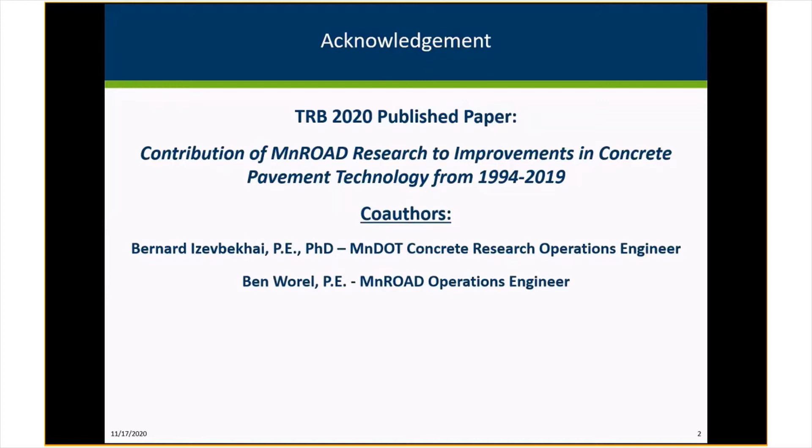Before I begin, I'd like to acknowledge my co-authors. Much of this presentation stems from work that we put together, a TRB paper last year. It was published, very similar title. I had altered it a little bit because I have some updates. But again, I want to thank Bernard Izevbekhai and Ben Worel for helping complete this paper that really looked at what's been accomplished related to concrete pavement technology over the past 25 years.

Just an outline of today's presentation. I'll give a brief history of MnRoad for those that aren't really familiar with the project and how it evolved. And then I'm going to spend most of my time outlining the significant contributions to concrete pavement technology that we feel have come out of this facility, related to design, materials, construction, rehabilitation, pavement monitoring, evaluation, and full-scale testing. And then I'll wrap up the presentation talking a little bit about the future.

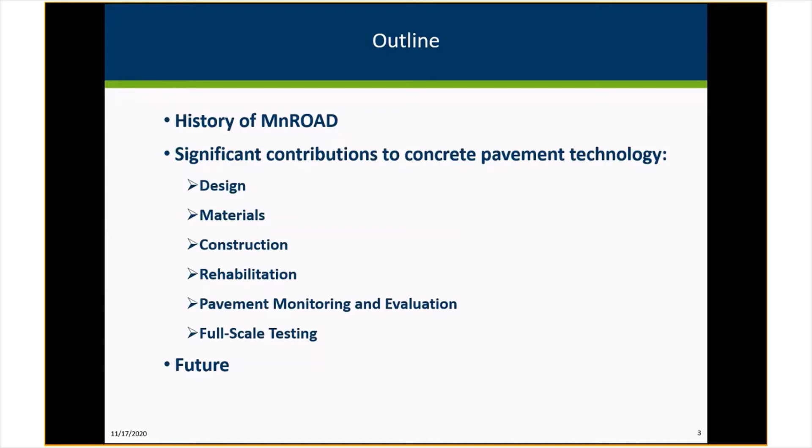So the MnRoad facility, for those who are kind of new to it, it's a full-scale test track in the mid-section of Minnesota. Has a couple components: a 3.5 mile mainline section here that receives interstate traffic that's diverted off of a parallel section of I-94. And then there's a 2.5 mile low volume closed loop test loop, which receives trafficking from one legally loaded semi-truck tractor trailer.

MnRoad is kind of unique in the nation, the fact that it has all the different materials. There are other test tracks in the US and around the world that are focused on one specific material. This particular facility covers all the material types, predominantly asphalt and concrete. And then if you want to talk about composite pavements or overlays, that has also been incorporated into the facility over the years.

Operations began in 1994, and one of the unique things, of course, it's run by a public agency, so the data is freely available. And really, what it provides is opportunities for bold ideas. This is a place where you can afford to fail because we have the opportunity to switch traffic off, back to the old main line of I-94, or if something happens on the low volume route, we can shut down operations of the truck. So again, we're celebrating over 25 years of operation.

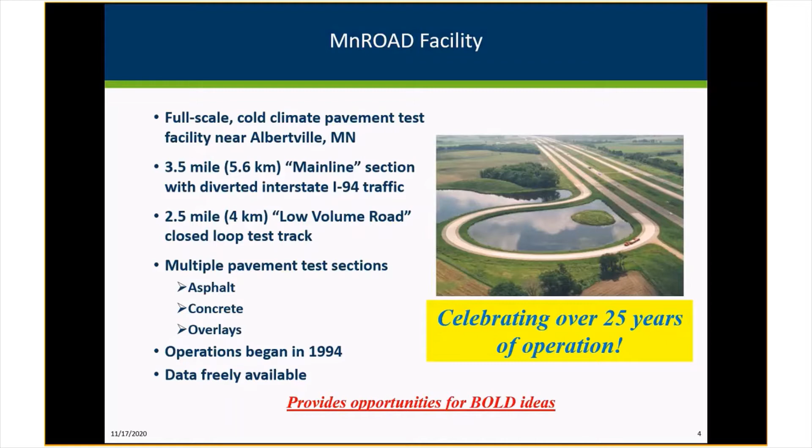It's been a fun ride. Talking a little bit about the operational history, the facility itself, planning started in the late 80s, and it took up until 1994 to get it constructed. It was constructed for about $25 million, in those 1994 dollars. If you were to construct this facility today, it'd probably be 3 or 4 times that amount. So it really was an incredible investment by MnDOT to build this facility.

Phase 1 was funded by MnDOT and the Local Road Research Board, which receives a fixed amount of state tax to look at local road research issues. Again, that kind of predominantly focuses on that low volume road loop. And we also received FHWA funding. And when it started, all the experiments were determined by MnDOT and the Minnesota Local Road Research Board because all the funding was coming from that.

Then in phase 2, about 2007, we started adding some pooled fund partners in addition to the MnDOT and the Local Road Research Board and FHWA funding. So we started becoming a little bit more of a national facility. And some of the experiments were not totally determined by MnDOT anymore. There was starting to get some interest by national partners, and something maybe another state wanted to study, and we would put it on here and study it for them.

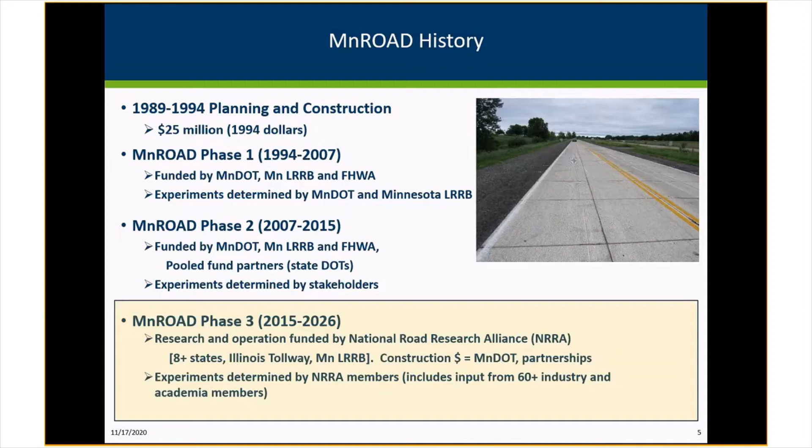Construction remained with MnDOT, but then again, we started receiving some construction money and help from partnerships. The big shift now is that all experiments are determined by NRRA members. This includes not only state agencies, but other industry and academia members. I'll talk about more of that near the end of the presentation.

So looking specifically at the concrete pavement related history, the sections that were concrete pavement test sections on MnRoad, you can see we've had quite a number of sections. Phase 1 really focused on validation of what we were using back then in the early 90s, the AASHTO 1993 design, and specifically there was test sections on the mainline section that were designed to last 5 years and 10 years according to those design procedures. And then there's also some other related studies, materials, low volume road designs.

And then near the end of phase 1, we started looking more and more at white toppings and bonded concrete overlays of asphalt because those were starting to become popular and they wanted to learn more. So we started constructing those.

Phase 2 opened up again. We started getting pooled funds, so we get a little more breadth of the type of topics we're looking at. Again, more white topping sections. Some of the things we were starting to see from the first phase was that the AASHTO designs were very conservative, so the question was, well, how thin can we go?

So we constructed some very thin sections, and that's really one of the things about this facility is you can take those chances that if it fails, you still have the opportunity to switch traffic off and kind of address the issue.

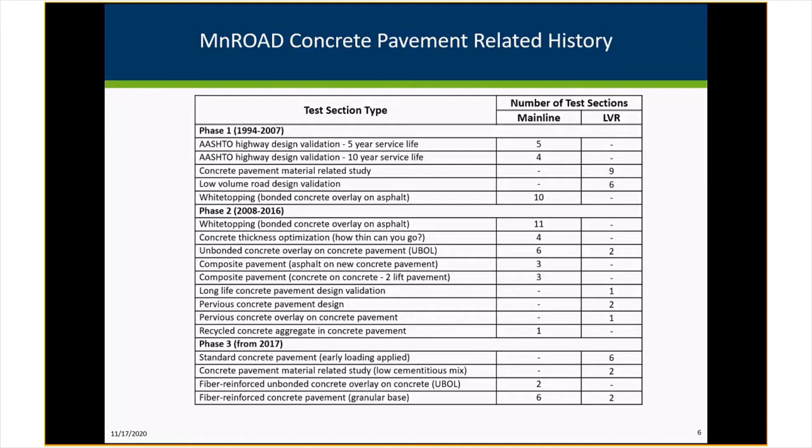So I'm going to give you a little bit of summary of what we feel is some of the significant contributions, related to improving the knowledge, implementation of findings. I'm talking about some of the test equipment that's been either evaluated or developed at MnRoad. Talk a little bit about what did not work, which actually in the realm of pavement research is a benefit to the people because you can avoid, rather than doing miles and miles of something that's going to fail, you can do a short section and we can tell ahead of time that it's something you probably want to avoid.

Also touch on some of the contributions to some of the national studies that MnRoad has been an instrumental part of.

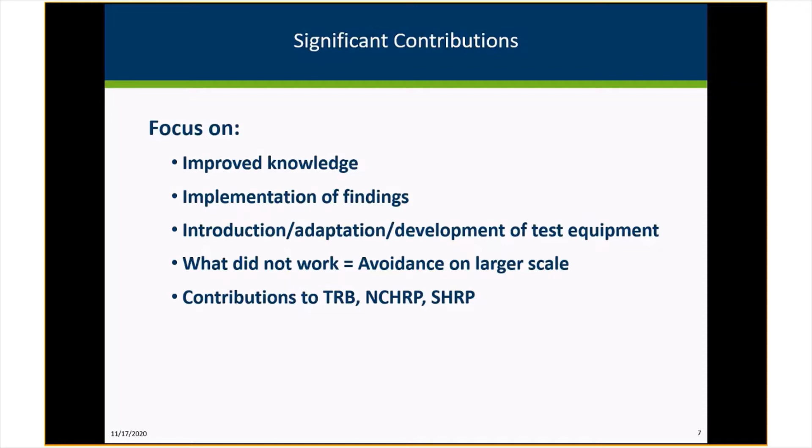So the first thing that I was involved with as a young engineer was using the as-built features of the test cells and predicting, now that we built the cells, how long do we predict they're going to last? Because we know what you design and what you build is different. There's different properties that come out. There's variations in thickness. But in any sense, those 5-year design test sections, which were ML5 to ML9...

Even the 10-year design sections—some of these, it's not that they wore out, but we just felt that the experiment, there was better things to study. So we knew that it could go longer, but we decided to replace them with different studies. So again, we still have a number of sections that are out there after 25 years, which gives us the opportunity to really develop long-term performance curves for these sections.

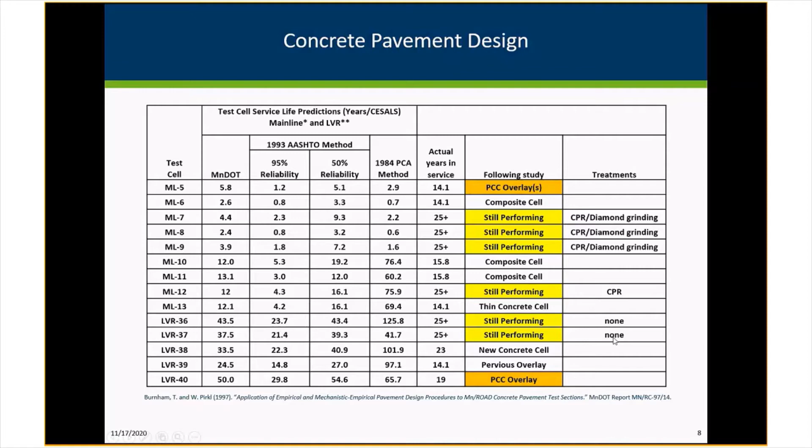So I would say the design efficiency award goes to test sections 7 to 9 on the interstate. These were 7.5 inches of jointed plain concrete pavement, over 4 inches of permeable asphalt stabilized base, over 3 inches of granular base. Nothing to do with what people are talking about needing 3 feet of frost-free design. These things have performed stellar. The only thing they had was that they were constructed with 1990 mixes that tended to deteriorate on the surface. But within the joints, we had very little deterioration, predominantly because that permeable asphalt stabilized base was consistent and provided very good drainage. So it points to some of the thoughts back in AASHTO where you need 12 inches of design on an interstate. This demonstrates that was a very conservative design, and we could probably go thinner.

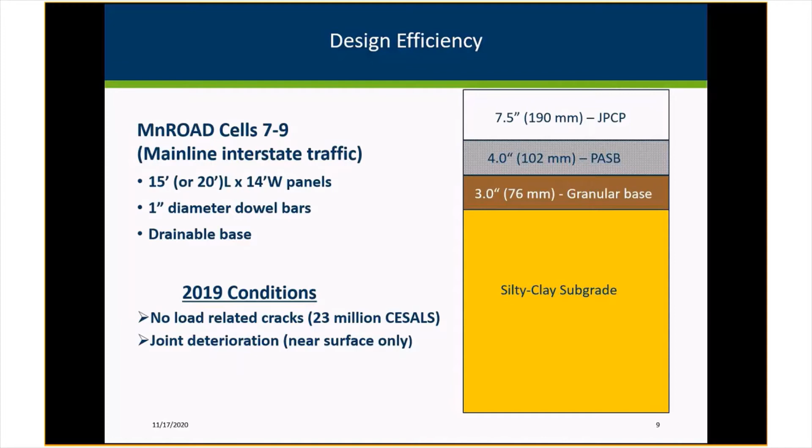So speaking of thinness, that's kind of where this headed. In some respects, it's interesting that you're trying to do concrete pavement research when you know concrete pavements are supposed to last a long time. How do you learn anything? Well, one thing you do is start thinning out, and that's really where a lot of the experiments headed. Some of that thinness dealt with the fact that we were studying white toppings, put on asphalt where you have good support already. You can see all the various thicknesses we were testing - these are crazy thin sections for most interstates. We're out to accelerate the mechanisms and understand what the failures might be. You might never put a 5-inch on an interstate, but it's certainly going to tell you sooner what's going to happen if it were put on a lower volume road.

Really the ultimate one was the concrete thickness optimization experiment, where we incrementally increased it by half-inch increments, and we were able to understand that in the end, really 6 inches is about as thin as you can go and still have a factor of safety in your design. Anything thinner, it lasts for quite a long time - several million ESALs - but any little bit of non-uniform support in the base, it really popped through right away. So it told us that our good rule of thumb is 6 inches is about as thin as you can reliably go. We're also starting to learn things fairly quick on these really thin, ultra-thin fiber reinforced concrete sections - we have one section that's already gone after 2 years. So again, just really pushing the limit.

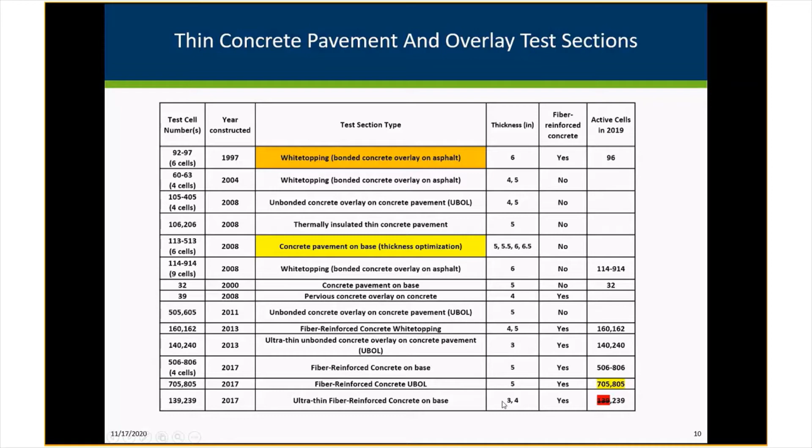We learned the age-old lesson that drainage is key. Your design has to have drainage. This happened to be a panel removed for a forensic activity, and you can see the water from a rainstorm sat in there for 3 days before it was gone. That tells you our older designs with the dense graded aggregate base, no edge drains - this is what you get, and this is why the joint deterioration accelerates, at least in our climate. So we all know that drainage is key, and this is a very graphic example of what happens underneath your pavement.

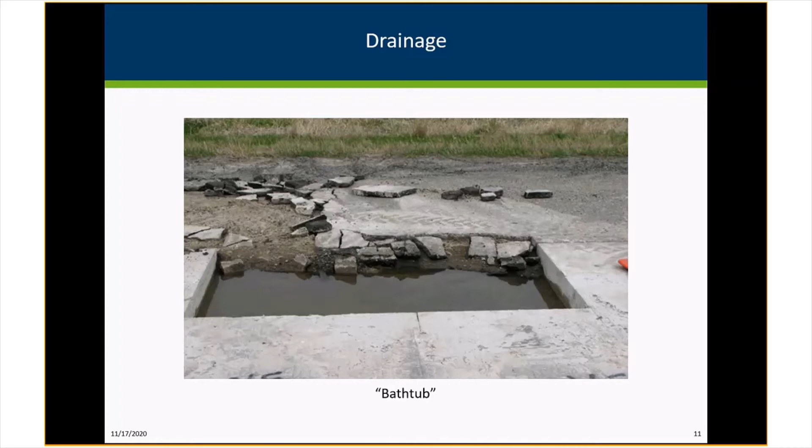So one of the technologies we tried at MnROAD involved, not a new idea since it's pretty prevalent in Europe, putting some kind of geocomposite joint drain underneath just the joints. For the most part, we don't get a lot of joint deterioration between the panels, between the joints - the slabs are okay, but if you pull out panels after several years in our climate with those older mixes, you find a lot of joint deterioration. So this is one easy way we felt to address it. The ironic thing is, we had just installed this, and within a year it was already being implemented on network projects. We said, well, we're not even done the research, but it just makes sense, and we know it's a proven technology in other countries. It also allows you to use those more dense graded bases, because you're just draining where it has to be drained, and that's at the joint location.

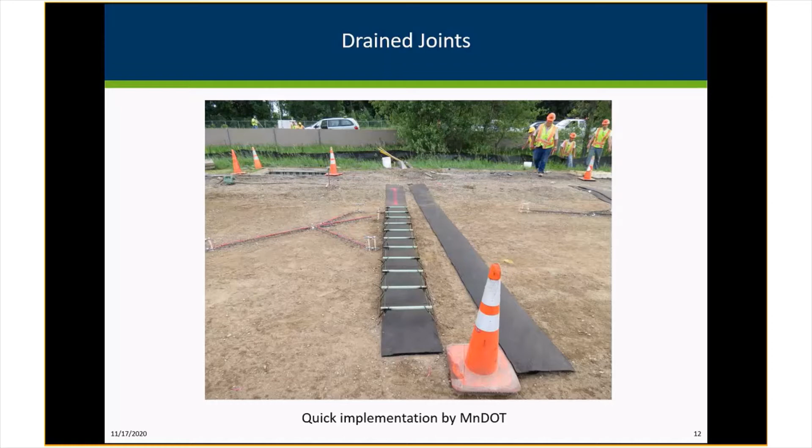The long-term question of seal versus no seal raises questions answered by work at MnRoad. In this left-handed case, it's a white topping. When water gets past your asphalt seal, it has to be partially sealed, and it seems to trap water. We got tremendous deterioration within a short amount of time. We had other cases where there was no seal, and you can see, pulled out, there was no deterioration. So I don't know that it's specific to your situation, but the ultimate answer again is drainage, drainage, drainage. We've also learned that some of the materials we're using are not long-term solutions for sealing out water. Sometimes it's better not to have a seal than something like a partially sealed joint.

As a result, our current MnDOT specs, except on low volume road situations, have really gotten out of the business of using joint seals, at least until better materials can be developed.

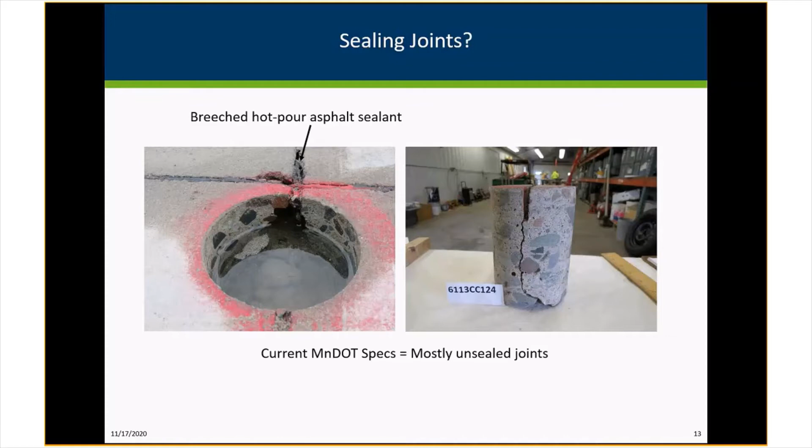MnRoad has been a very big contributor to understanding surface characteristics for concrete pavement. We've had every kind of texture you can imagine, addressing noise, safety, and the durability of texture, as well as being able to construct it. Tremendous knowledge has come out of just examining all these various textures.

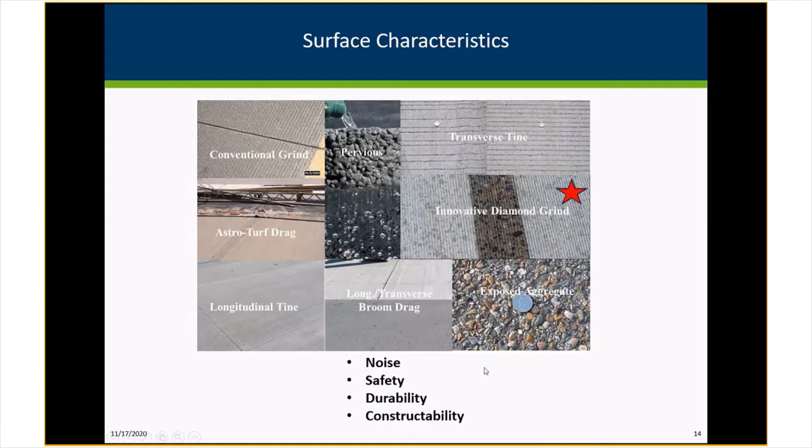MnRoad data has also been very instrumental in helping improve design procedures. It coincided with the development of the Pavement ME. Over this whole period from the early 2000s till now, a lot of model calibration and understanding has come out of MnRoad data. It's also helped develop a new mechanistic-empirical procedure for bonded concrete overlays on asphalt, or white toppings.

As well as a recently completed unbonded concrete overlay design study, it's also been used to calibrate the current design procedure that MnDOT uses, as well as some national lower volume road design procedures. We've given out numerous data requests internationally, so while we can't account for it all, we understand there are other people around the world using MnRoad data that is influencing their design procedures.

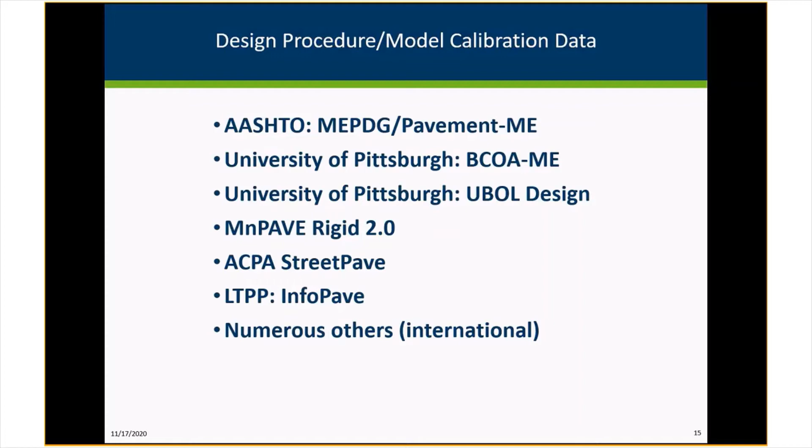As far as materials, we've studied a lot of different materials, anywhere from high performance mixes designed to last 60 years to recycled materials. Again, not only using concrete aggregate underneath as a base, but also within the concrete itself.

More recently, there's been a lot of focus on determining whether we can figure out the benefits of structural fibers, at least the synthetic structural fibers. We've looked at pervious matrices, whether it's an overlay or on grade. We've learned a lot there.

We also have a section where we put corrosion-resistant dowel bars. Still working on summarizing the results from that, but I've not seen any detrimental impact of using that in that particular test section. We've also studied a number of alternative joint load transfer devices, anywhere from joint stabilizers to plate dowels.

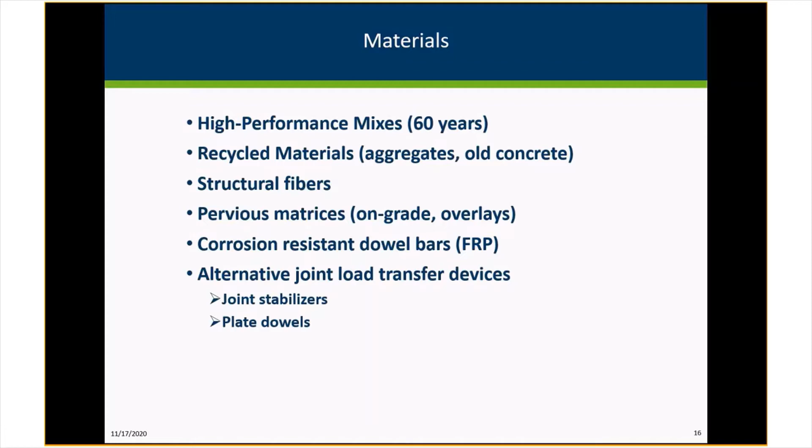Looking at the effect of drainage on the materials, we can see again the difference between a slow draining base, like a dense graded Class 5 base, versus something that's permeable, just night and day performance. And again, this is somewhat a factor of the type of mixes.

You can see the type of mixes that we used back in the early 90s. I think we've made substantial improvements to the mix designs we use today. We would hope that even if you had not ideal drainage, you would never get something that looked like that with the particular mixes we're using today.

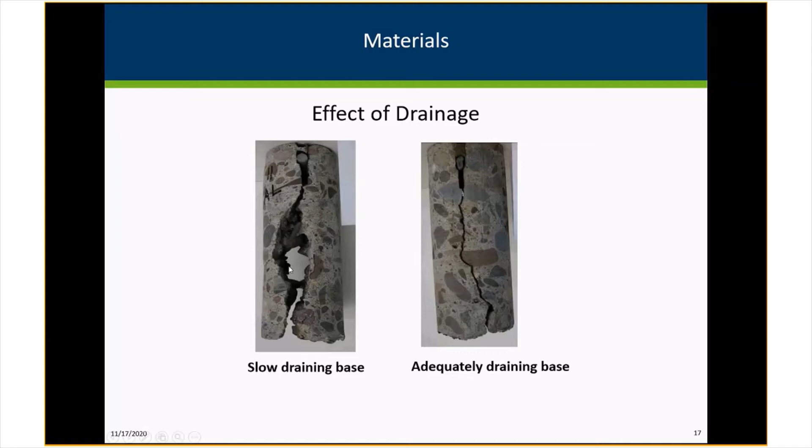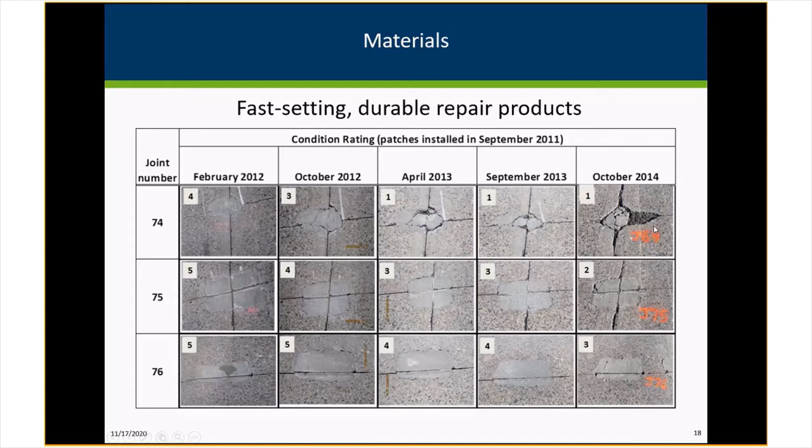MnRoad has hosted a number of concrete repair material evaluations. This one here, beginning in 2011, ran for about 3 or 4 years, and you can see a time-lapsed study of how these materials performed over time. It's been very instrumental in understanding that.

Again, now a lot of work with reinforced concrete. Fiber reinforced concrete actually began back in 1997. However, back then we had only one section that had what we would consider now a structural synthetic fiber. We were a little bit naive at the time, and they said, well, you need 25 pounds per cubic yard. So we put that in, and it actually became detrimental to the pavement.

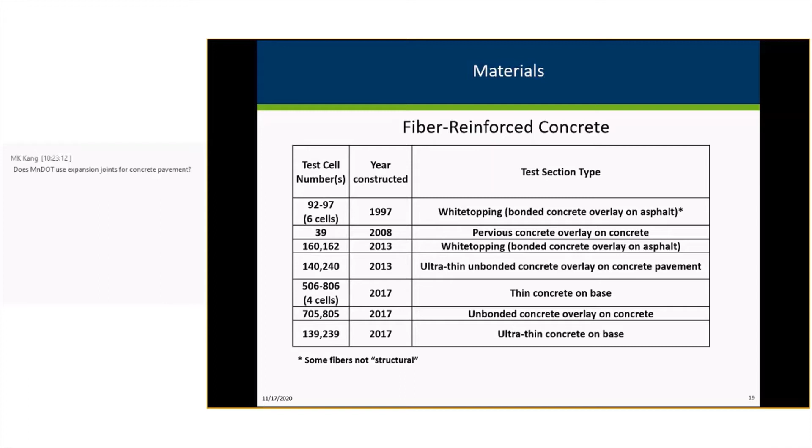That particular section is actually still out there performing, but all the joints are just deteriorating, likely due to the overdosage of the fibers. The other particular sections had what we would consider today microfibers, which had little impact on any kind of performance.

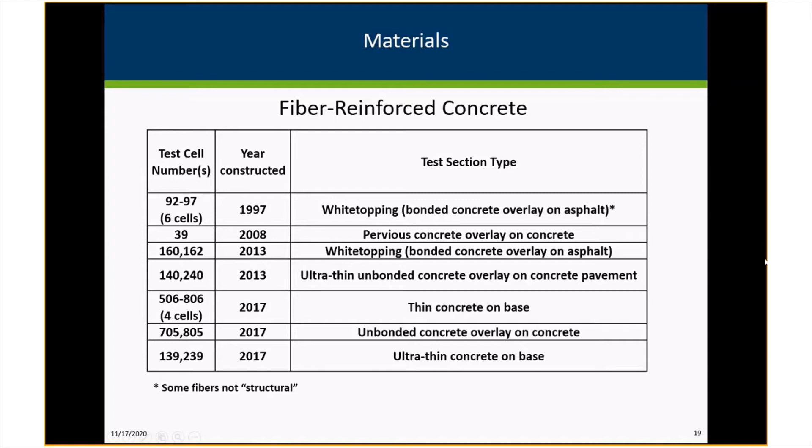MnRoad has always used real construction, so we've had to push the contractors into very uncomfortable situations, whether it's trying to work around sensors or paving something extremely thin, which you wouldn't think would be an issue, but they're used to designing and paving 8-12 inches, and when you tell them to pave 3 inches, it gets very scary, especially when paving over very delicate sensors. But we've learned a lot from that.

We also did 2-lift construction sections with the SHRP 2 program that turned out pretty successful. The contractors have had to deal with uniform distribution and mixing of the fibers, which is always a challenge. Lately we've pushed them, or really the construction aspect, on whether we can open things much earlier than we think. So experiments have taken place related to that.

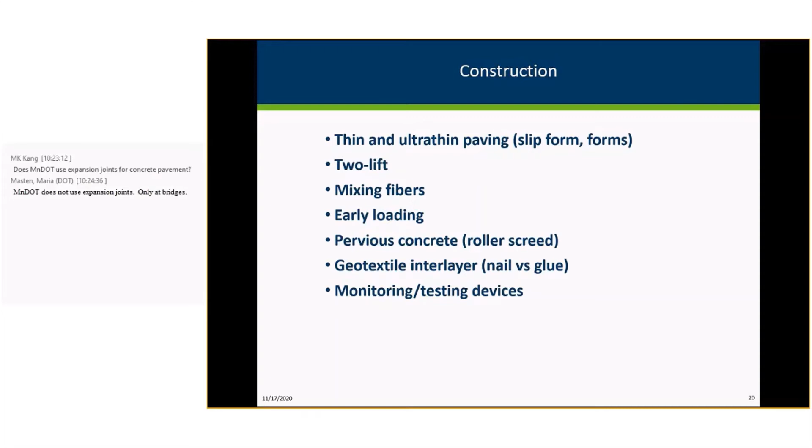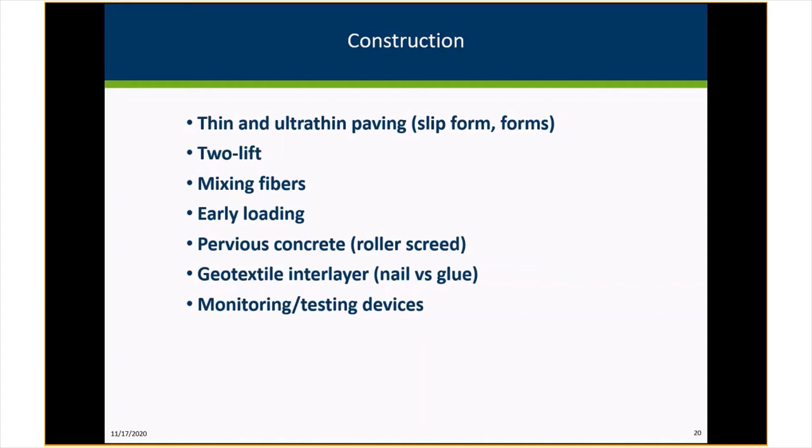We've dealt with pervious concrete construction using roller screed and understanding some of the issues with that. Some improvements in the use of geotextile interlayer and how that's secured to the pavement, as well as monitoring and testing devices related to construction of concrete pavements.

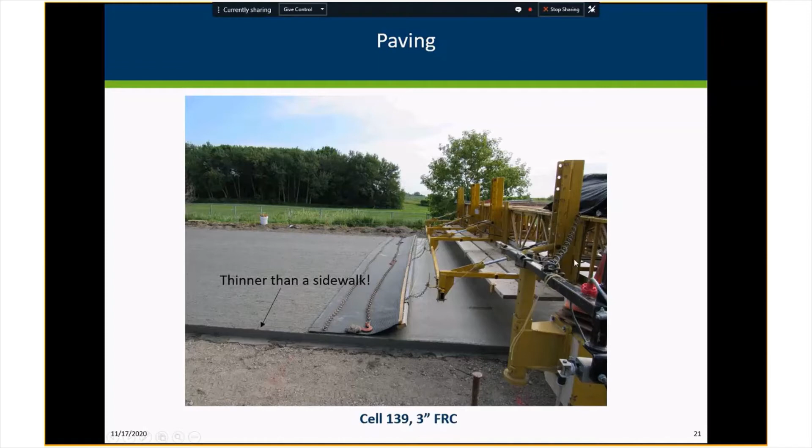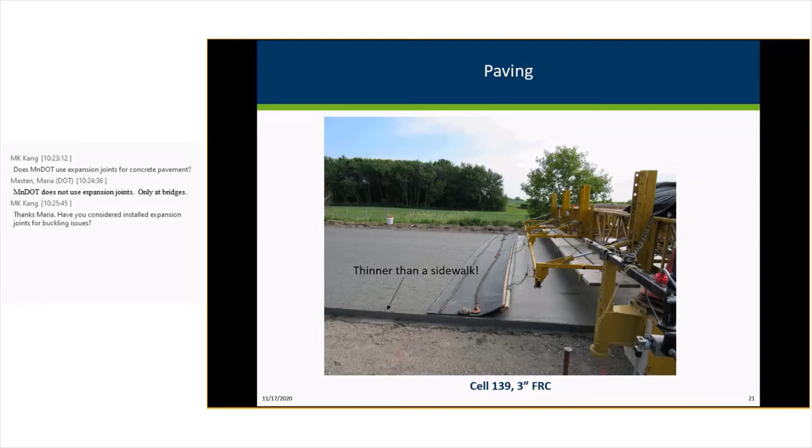Here you can see a picture of cell 139, which was a 3-inch fiber reinforced concrete. And if you start thinking about 3 inches, that's actually thinner than a sidewalk. But the contractor did a very good job in pulling that off, and it was a very consistent section. Unfortunately the section, as we might expect, failed very quickly. But again we learned something about whether the fibers contributed to the strength of that particular section.

This may not have been the first application, but it's probably one of the first times where there was a contractor interested in learning whether we could secure this fabric differently than trying to nail it down. Because using nails into concrete, you had maybe a 50% success rate. So we got involved with, I think it was 3M, who came up with something you just spray on the pavement and it sticks down, and it actually worked very well. I think this is kind of the adopted standard now. So I'm not sure if this was the first application, but certainly was a high profile instance of trying this procedure.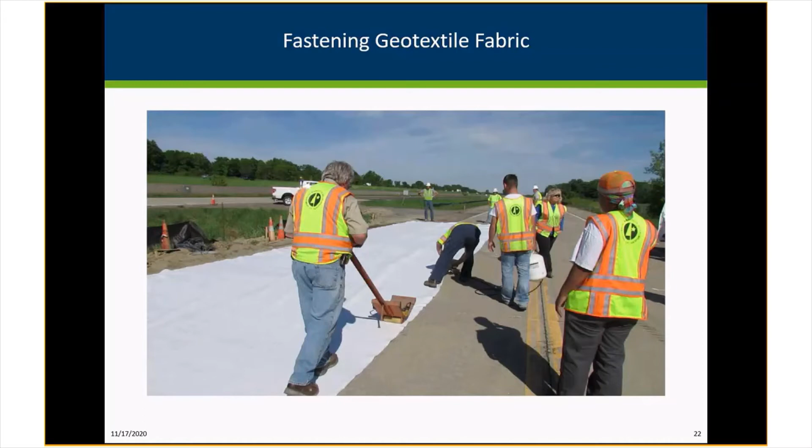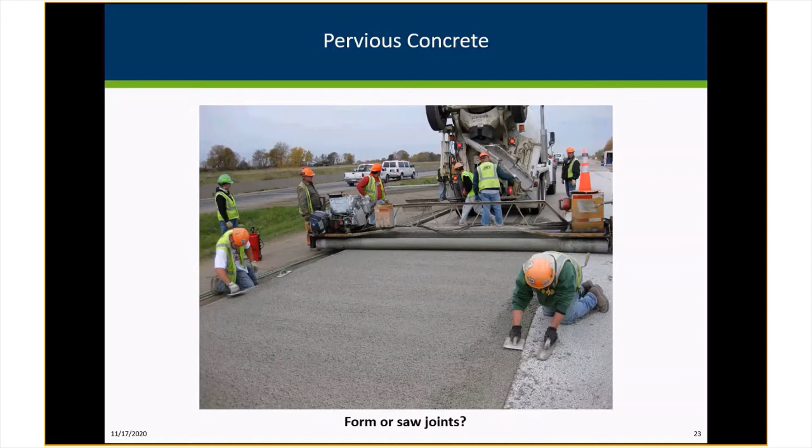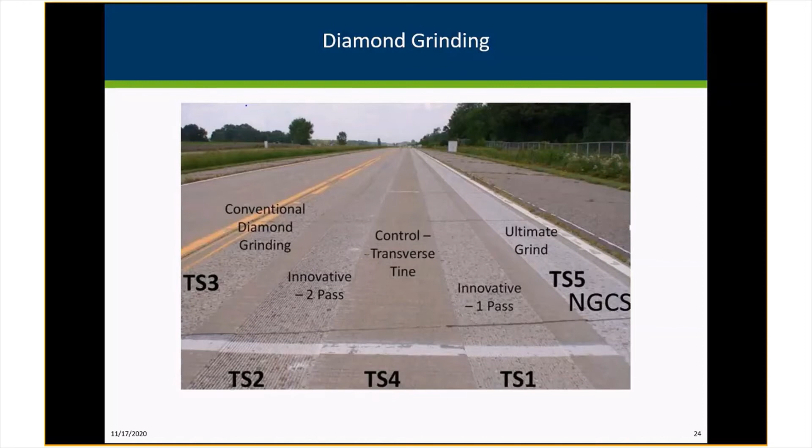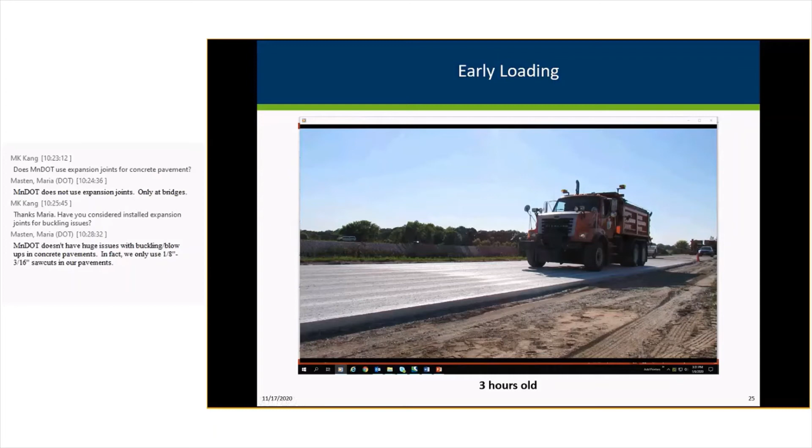Early loading - again this is something that happened only 3 years ago, where people say one of the problems with constructing concrete pavements is they take too long before you can put traffic on them. So we wanted to answer how soon can you put traffic without causing some kind of immediate or long-term damage? You can see here, even before the joints were sawed, we were out there at 3 hours old running this, which happened to be an empty plow truck. But nevertheless we did not see, and we still today do not see, any of that loading effect.

So I think we're still learning. Last week I was out and I did notice that some of the transverse joints seem to be opened wide, but again a lot of this loading occurred before those joints were even sawed. It's kind of interesting. But as a result, people have gained a much higher comfort level putting specifications out there that pavements can be opened, especially to lighter traffic, much earlier than they used to be.

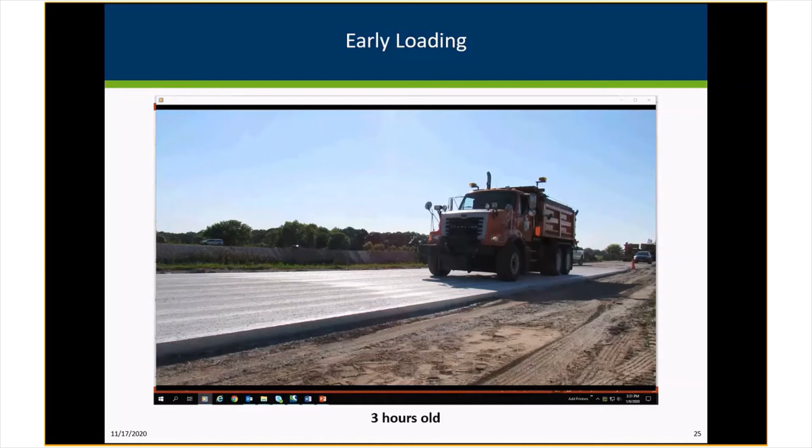MnRoad has always prided itself on using the latest and greatest testing devices, so we always try to acquire the newest equipment and use it as much as we can. In the lower right corner, this is even equipment developed specifically at MnRoad - a sweeping laser profiler used for warp and curl measurements. We're probably not the first, but we made pretty specific equipment to accommodate the longer panels, over like a 15-foot beam, to accommodate the widened sections and doing some of the longitudinal and diagonal measurements.

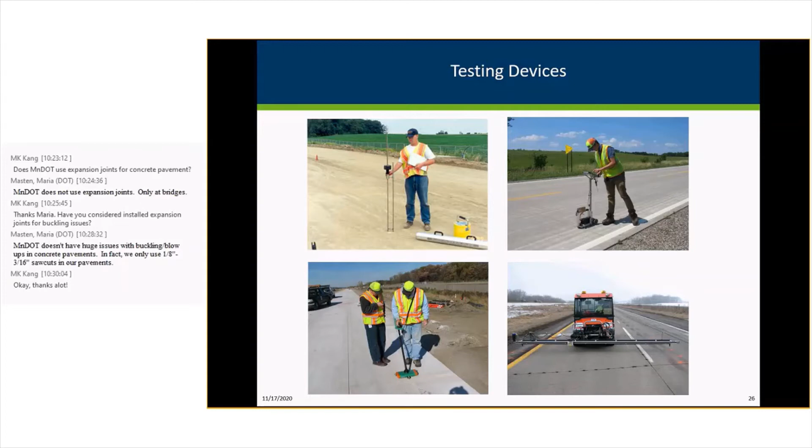Up here is the automation of the Georgia fault meter. So we took a simple device and made it complicated by throwing a laser on there, but for the amount of data we have to collect, we really needed something where you weren't just writing each measurement on a piece of notepad and then having to transfer it. In fact, we're in the process of actually upgrading that again. So it's a very useful tool we use not only on MnROAD, but on other outstate studies.

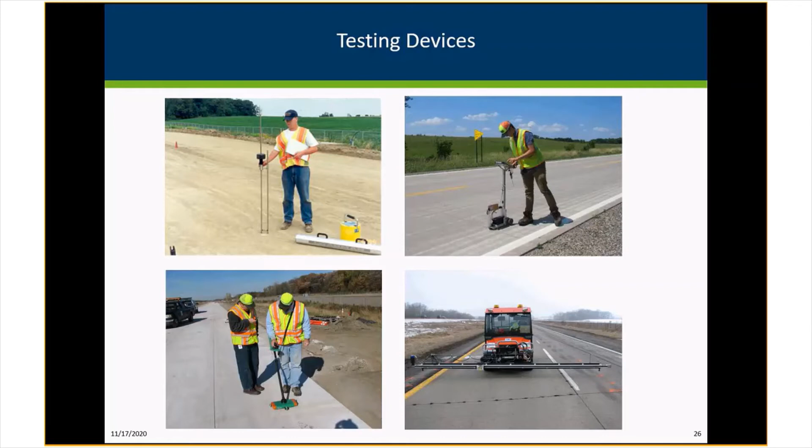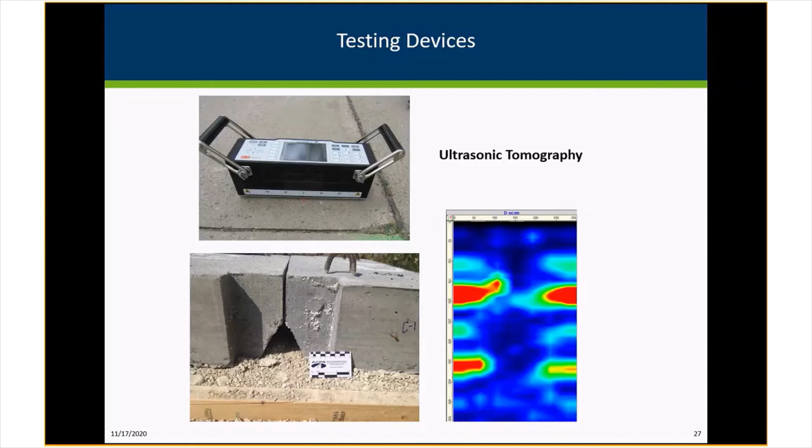Very recently, we got this device called the MIRA, which is an ultrasonic tomography device, and it's a very interesting tool that gives you almost an X-ray vision into the concrete. The technology bounces sound signals off of interfaces, and as you can see here, it does a fairly good representation of detecting even this ramped void underneath this joint that was intentionally constructed for testing purposes. This tool is actually being used quite a bit now for detecting deployment of joints, whether after the saw cut is formed it actually cracks all the way through, which is an important feature, especially for concrete overlays.

MnROAD has been instrumental in using and also improving the technology related to surface characteristics. There's been a lot of development work and improvements made on the OBSI tire-pavement interaction noise testing. A lot of that work was done at the MnROAD facility.

We also use both the typical pavement management vans for doing our profiling, as well as a much more research-level approach by mounting lasers on a small lightweight vehicle. Over the years, these lasers have changed anywhere from a point laser to a line laser, an area laser - there's all kinds of developments. It's a perfect facility with all these various textures to really evaluate what you can do with these particular lasers and how it affects the outcome.

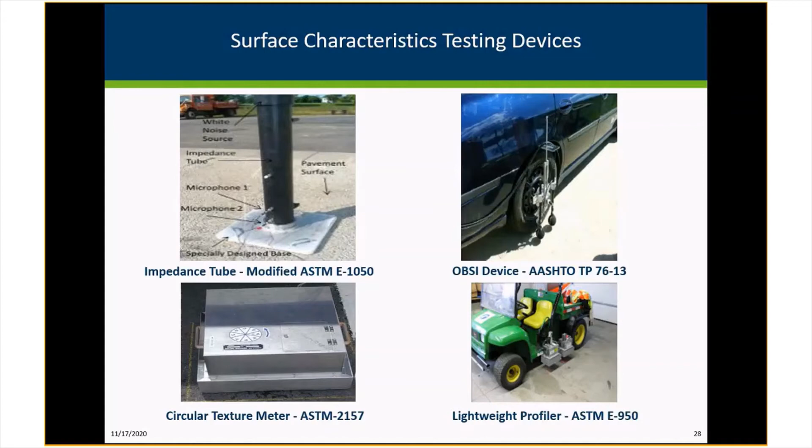As MnROAD aged, in the real world everything now is more about rehabilitating pavements rather than laying new concrete down, so the experiments also mirrored that. A lot of work has been done on concrete overlays, whether it's white topping or unbonded concrete overlays, even pervious concrete on concrete.

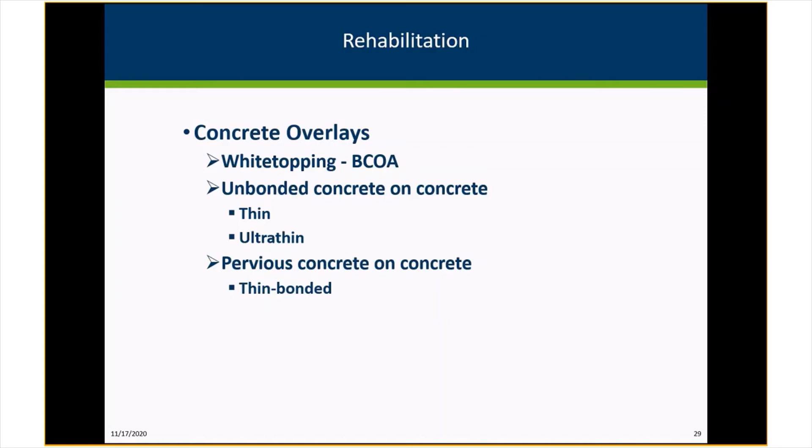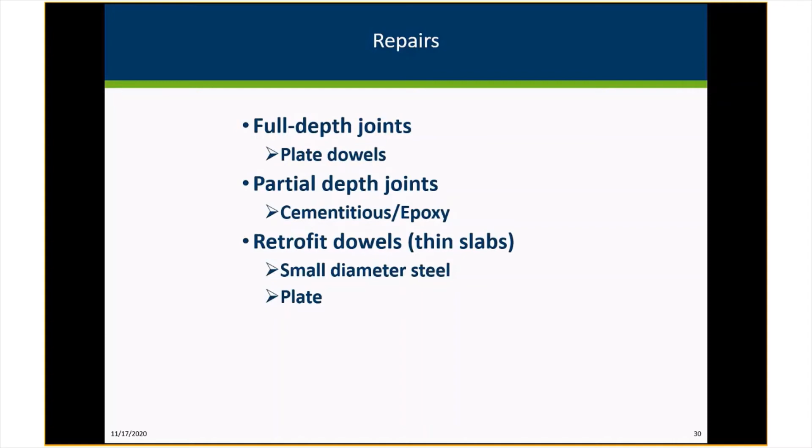For repairs, as we keep some of those original sections around and the joints got deteriorated, we experimented a lot with both full depth and partial depth repairs, looking at retrofit dowels and various materials for repair. We also looked at what kind of repairs can be done on very thin slabs, which gave us the opportunity to really examine the difference between a small diameter steel dowel and a plate dowel.

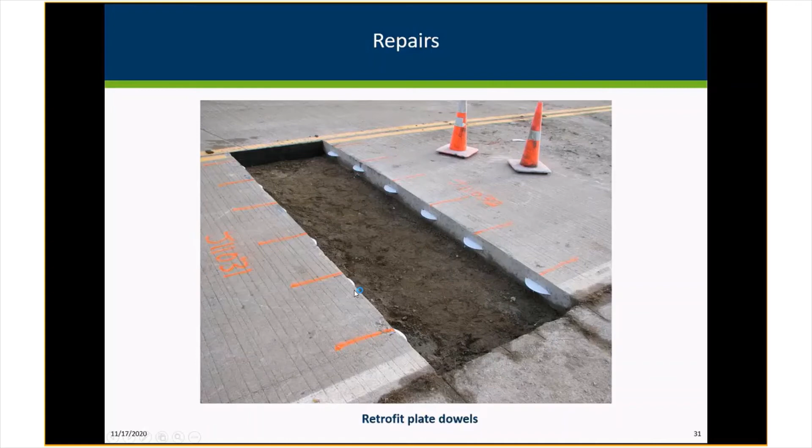However, that was a 6-inch pavement. They were also utilized here in repairs done to a 5-inch concrete pavement, which was in fairly poor condition when we did this, so there was a lot of voids underneath. It was probably a lot to ask, but you can see almost the pattern from the surface that these particular dowels had high enough stresses that they really blew through the old concrete pavement, not so much the new concrete patch. This section also had a situation where we tried retrofitting dowel bars, both the round and the plate dowel bars - not so much the round ones, but also just long plate dowels, looking like maybe a xylophone key. Some of those worked pretty well, others did not.

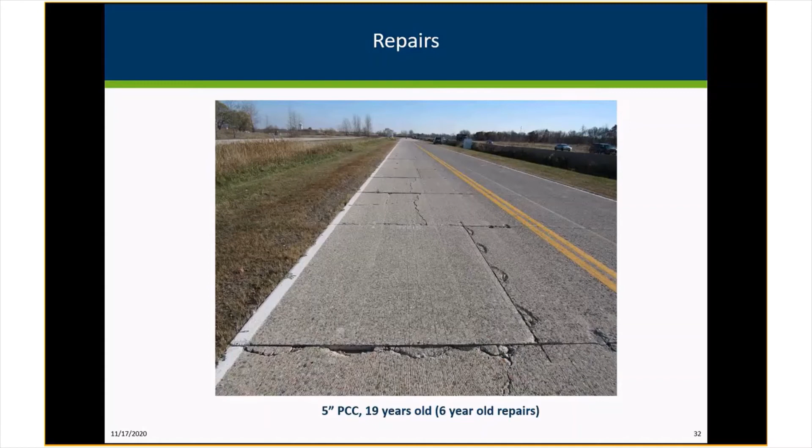For pavement monitoring and evaluation, MnROAD has been instrumental in the fact that we've done seasonal FWD testing. So we have this 25-year history of seasonal FWD testing, which I think has been invaluable to a lot of studies and development of design procedures.

The FHWA has taken advantage of all those various surface types that we have. They're able to conduct rodeos and do a lot of calibrations. In fact, MnDOT's MnROAD is used every spring for certification of our contractors' profilers every year, so it's been a very useful facility for that.

Although I have to say that in the beginning, they used both asphalt and concrete cells. They discovered that concrete panels move around a lot, so they've kind of taken some of that certification strictly to the asphalt pavements. So lessons were learned over time, as it became difficult to do certification when the panels are warping and curling all over the place throughout the day.

MnROAD has hosted a number of demonstrations and calibrations of rolling weight deflectometers, which I think we all hope are the future of evaluating pavement. You can cover a lot more area than just a static FWD.

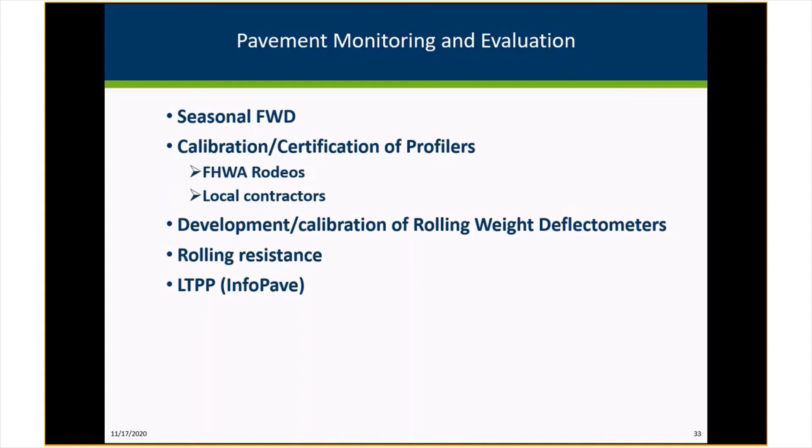Being one of the few full-scale pavement testing facilities in the U.S., we've been able to learn a lot of things over the years that are now being shared with others who are either running or starting to build their own.

Anywhere from looking at how to best install instrumentation—I think we've gotten fairly good at it, we have a pretty high success rate—we've also had some lessons learned where we tried things that didn't work so well.

If you put wires underneath directly on the grade, we find that they get scrubbed off with the movement of panels, and the wires get severed pretty quickly. So there's been a lot of things tried, and I think it's been a very interesting process.

One of the things we're learning is that these instruments don't give you exact measurements. They're relative, because it's very difficult to understand their particular orientation with the slab, even sometimes where they're located. There's variability in the depth of pavement. As controlled as we are, it's still difficult—the bottom line is you can't use them as absolute values. These are relative measurements that come out of these particular sensors.

We did learn that it's okay to have shorter test sections. Some people say you need 1,000 feet. No—we've had sections that are only 18 feet with 3 joints that have revealed the mechanisms of failure. It's very interesting, you can get by with something that short, but it really worked.

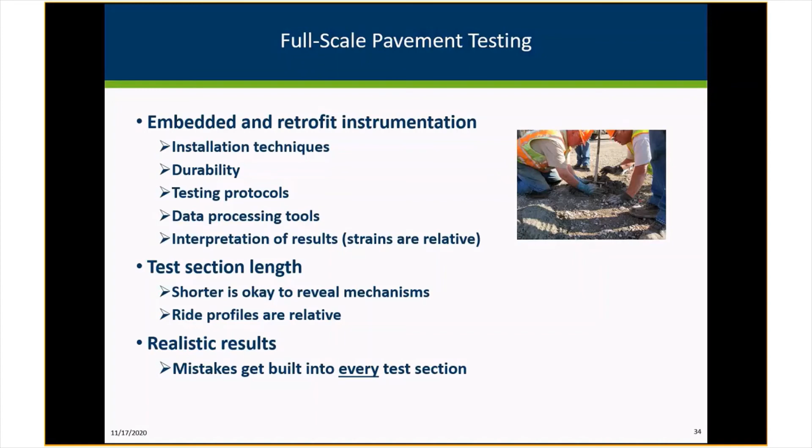We'll think we have everything calculated, and you have 5 feet left, and they run out of concrete and have to go make another batch—all these things get built into these test cells. We try to take the best measures we can to note everything down so it doesn't become part of the study. We know it was a construction mistake that caused that particular issue that shows up.

So now that I've covered the past 25 years, I want to talk a little bit about the current studies going on at MnROAD.

Right now things have switched over really to under the auspices of the National Road Research Alliance. You can see from this map who the members are. We have 8 states, the Illinois Tollway, and the Minnesota Local Road Research Board. Just in the past couple of months, we actually got a new member, the state of Mississippi. So it's still expanding as we go. But really what this is about is common problems and understanding how things work.

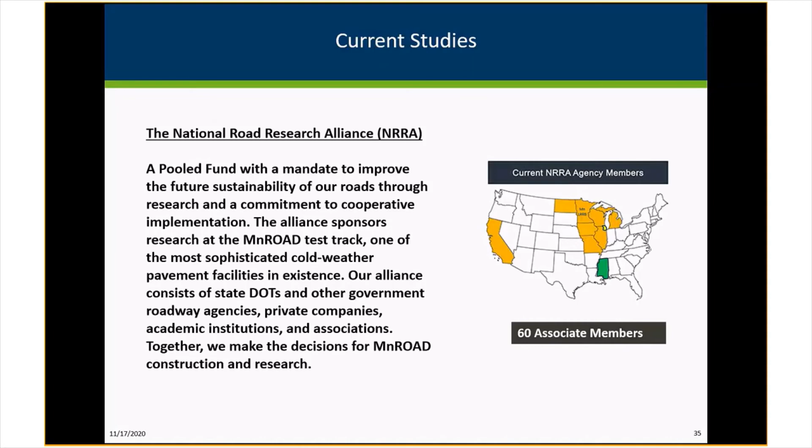A lot of the focus is on cold weather, but I think some of it isn't so much weather related. Even a state like Mississippi is still going to get things out of what we study up at MnROAD.

The current studies started in 2017, and a lot of them are actually wrapping up. They're kind of a 3-year first phase for a lot of them. A lot of focus again on fiber reinforced concrete, whether it was a thin overlay or slabs placed on grade, just to understand how thin you can go on a city road, like in a development. Can you go down to 3 inches if you put fibers in the slabs?

I showed before, again, understanding the long-term impacts of early opening. We did early loading both on new pavements, as I showed with the truck, as well as on a number of repairs that we loaded early. Again, understanding how far we can push it and still not cause damage.

We had concrete product evaluations, another round. I showed you the ones from 2011, and now we had another round. This time, these were actually put on the old westbound section where we divert our traffic when we're doing measurements. We've started to utilize that section and consider it part of MnROAD now, which gave us a little more real estate. It also has a 1973 reinforced concrete pavement with very, very old joints, giving us a good opportunity to see how we could repair those joints.

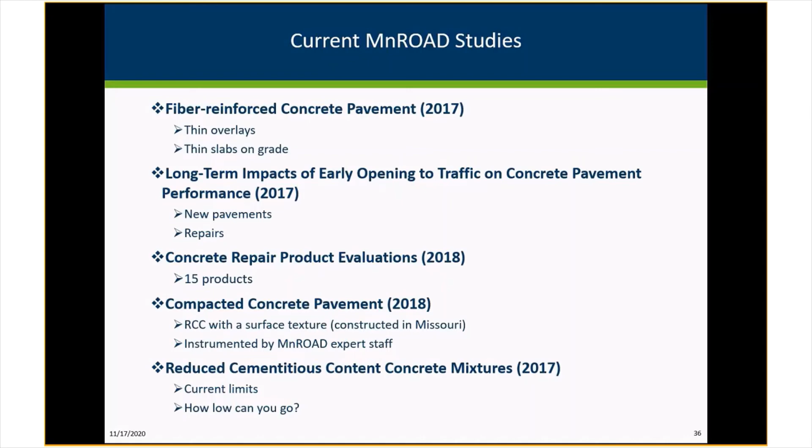And again, we have the reduced cementitious content experiment going on, really pushing that down and seeing how low you can go, from a sustainability standpoint.

What's the future of MnROAD? Well, fortunately, we just heard yesterday that the next NRRA Phase 2 has been approved as a pooled fund, and it's open. We're welcoming both renewing and new members, and you can see the information there. So if you're interested in joining, we welcome new partners, and we hope we get all our partners back from the first phase.

Out of this is going to come a number of test sections at MnROAD, both concrete and asphalt, that are kind of running out of steam. The studies are over and things are falling apart. So at this point, we're tentatively scheduled to do a pretty major reconstruction of the facility in 2022. You can see we're going to be doing concrete, asphalt, with a big focus on sustainable materials and designs, as well as resilience.

We're also starting to dabble in, and getting a lot of interest at least in MnDOT, understanding the connected and autonomous vehicle interaction. We actually had a driverless vehicle rolling around MnROAD, I think it was last year or the year before, prior to the Super Bowl.

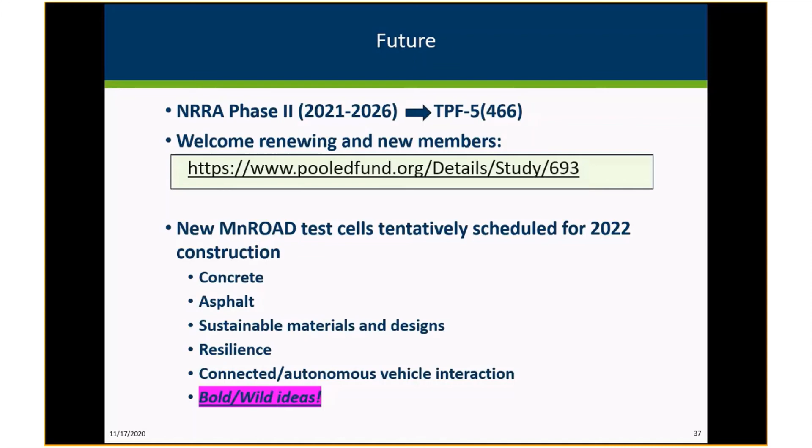So it's very interesting. And I highlight at the bottom, MnROAD is about bold and wild ideas. If you think you can come out and build a Lego road or plastic bottle road, this is a place to do it. That's really the benefit of MnROAD - you can really try some crazy ideas. If it doesn't work, we can tear it out, switch traffic on, and try a different experiment.

Some of the newer NRRA studies aren't exactly focused on MnROAD, but are other benefits if you were to become part of the NRRA. We're looking at mitigation solutions for dowel bar propagation cracking, a jointless fiber roundabout that was constructed and whose performance we're studying, performance of concrete overlays and full depth reclamation, effect of low and moderate recycled concrete aggregate replacement, and incorporation of a joint faulting model into the BCOA-ME.

We've learned from the first sections of fiber that the types of synthetic structural fibers being used came out of the industrial flooring industry and are not really suitable for pavements if you're going to use them for something like joint load transfer. So there's a study starting up to see whether they can actually be developed or not. It could be that they're not, but the ones we're using, the dosages, and even the testing regime need much improvement before they can be used long-term for load transfer.

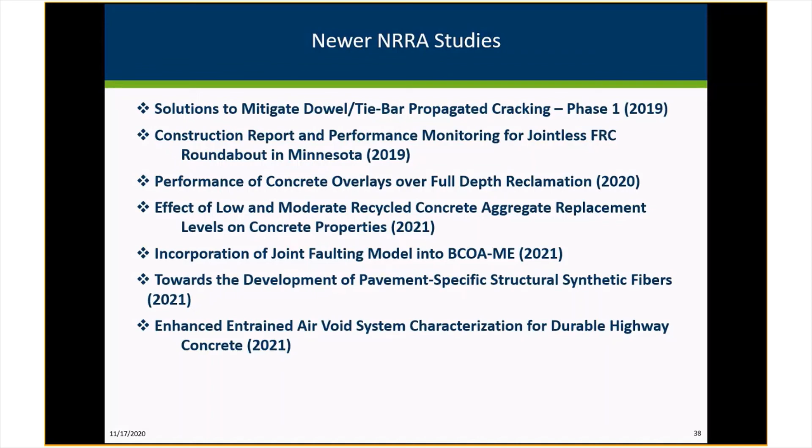So in summary, hopefully I've relayed to you that MnROAD has really contributed significantly to the advancement of concrete pavement technology over the last 25 years. And those contributions have been anywhere from local to all the way to international.

I think we've heard that there's next generation concrete diamond grinding going on in Australia. It's really touched a lot of local and international studies. There's an unlimited amount of data to look at. I think we have several billion rows of data. A lot of it is actually temperature data, so we could use that data to even help show the warming of the climate, because we have thousands of sensors recording every 15 minutes for the past 25 years.

We've been successful in providing information for technical papers. We've been very active in seminars, collaborations, and the development of testing equipment related to concrete pavements. We've developed a lot of pavement experts.

It wasn't a real popular field back 25 years ago, but I guess I'm a result of being involved in this particular facility. We've also had a lot of opportunity for student development, just the benefit of somebody being exposed to this facility has been really tremendous for a lot of students' careers over the years.

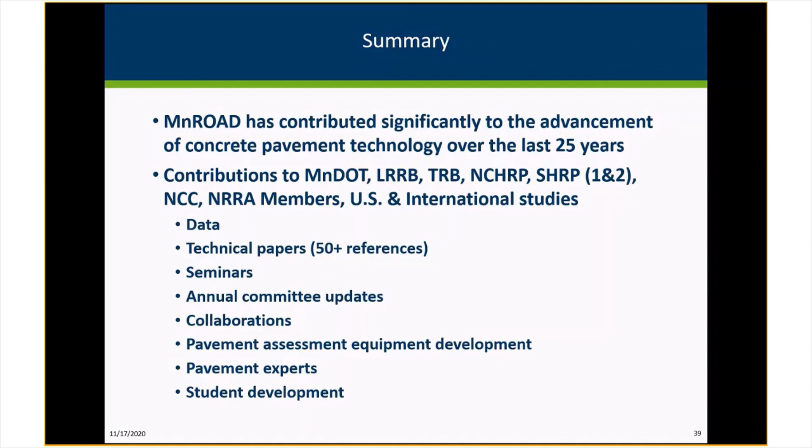With that, I'll end my presentation and take any questions you have. Thank you.

Thank you, Tom. We do have a couple questions here in the chat. Does MnDOT use expansion joints for concrete pavement? It looks like Maria answered that, and she says we do not, only at bridges. Yeah, there we go.

And there has not been any studied at MnROAD. Yeah, it looks like they take care of that information. If anyone has a question they'd like to ask, you can certainly unmute yourself as well.

Oh, we do have another one. Is there any effort in quantifying cost savings from the use of these outcomes from these researchers?

Yeah, there has been, certainly Ben Worel at MnROAD here has done some cost benefit work that you can look into. I don't have the specific name of the report, but obviously we get asked from time to time by our agency, why do you keep doing MnROAD? And I think we've demonstrated that we do have a good return on investment by doing these experiments at MnROAD. We've never had any questions from the upper staff saying you're kind of wasting your time.